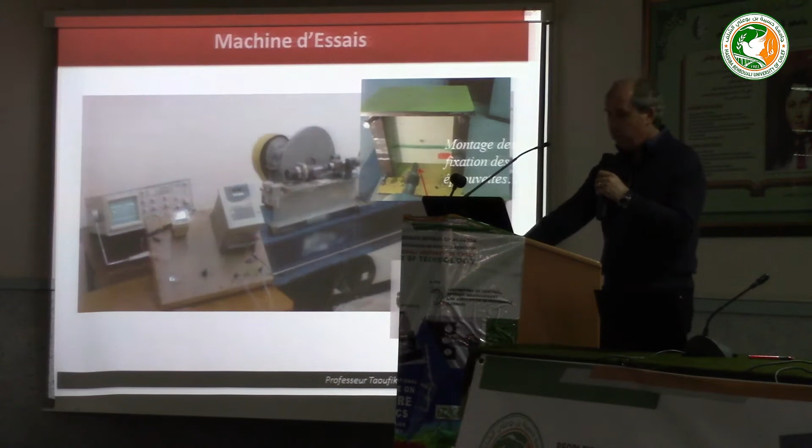Donc après, on fait des essais derrière, post-impact, par exemple. Là, c'est les essais de compression. On fabrique tous nos montages d'essais. On n'achète jamais les montages d'essais.

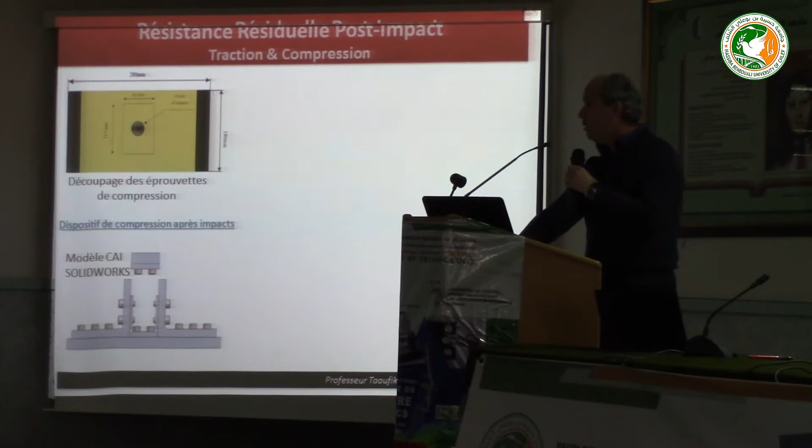On les fabrique, on les conçoit chez nous. Ça, c'est un montage pour faire de la compression. Donc ça c'est la plaque initiale, on coupe autour de l'impact une petite plaque, c'est celle-ci. Après on fait des essais de compression pour quantifier la rigidité et la résistance résiduelle de cette plaque impactée.

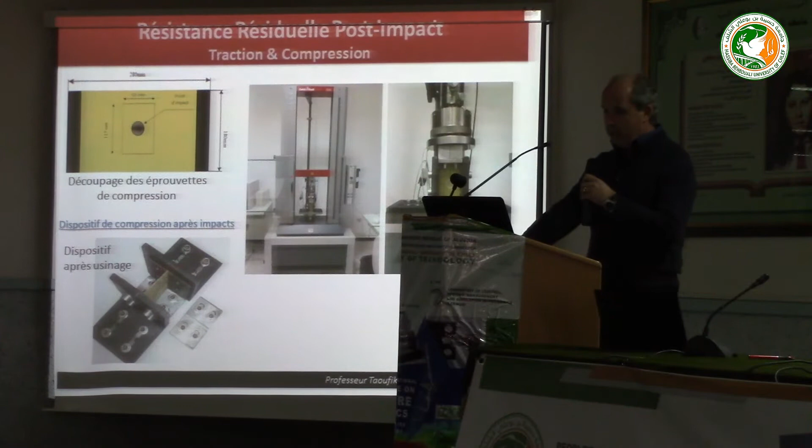Nécessaires au soudage. Je vais essayer de vous montrer la vidéo.

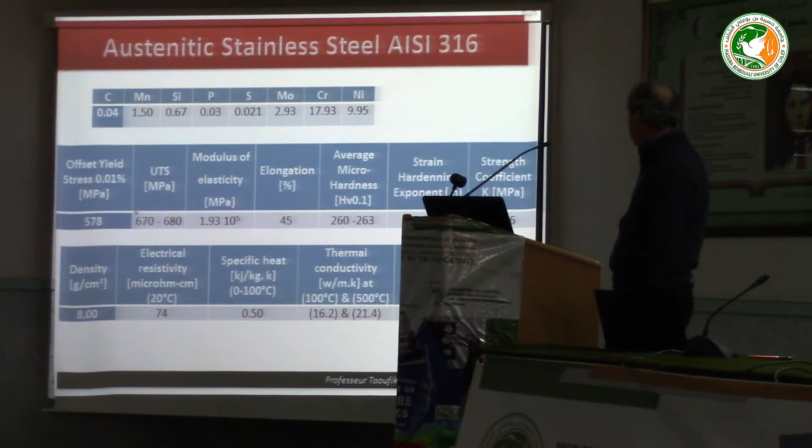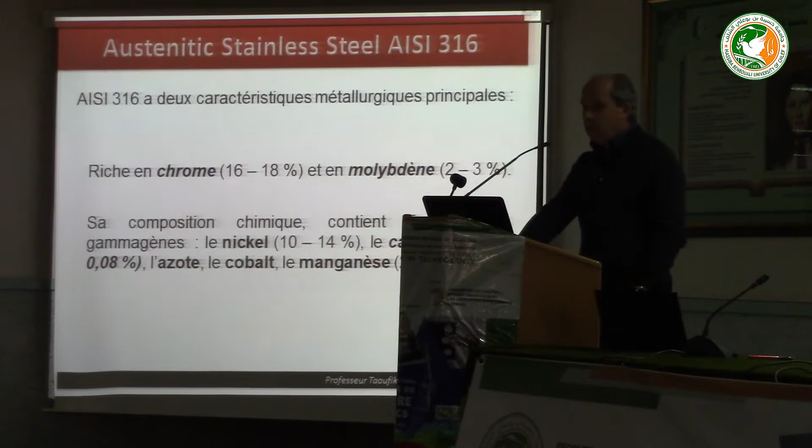Juste quelques mots sur cette nuance, c'est-à-dire les aciers austénitiques. Donc, par exemple, le 316, sa caractéristique métallurgique principale, il est riche en chrome et en molybdène. Sa composition chimique contient 5 éléments gamma-gènes.

Donc c'est un matériau très délicat. À l'élaboration, il faut faire très attention parce que ces éléments-là peuvent élargir le domaine ferritique, par exemple. Ces éléments-là peuvent aussi élargir le domaine austénitique.

Et en élaboration et en service, on peut avoir des surprises. Par exemple, la présence de la ferrite résiduelle ou la transformation en martensite par refroidissement ou par déformation peuvent beaucoup influencer l'austénite. La ferrite, on en a déjà parlé hier de ce problème-là, pourrait apparaître sous forme de bandes parallèles à la direction du laminage.

Voilà, c'est les bandes de ferrite. Donc malgré que ça peut être un avantage, ça peut aussi être un inconvénient. Par exemple, pour la soudabilité, c'est un avantage. Par contre, pour la durée de vie, c'est un inconvénient. Donc ces bandes de ferrite altèrent fortement la durée de vie du matériau.

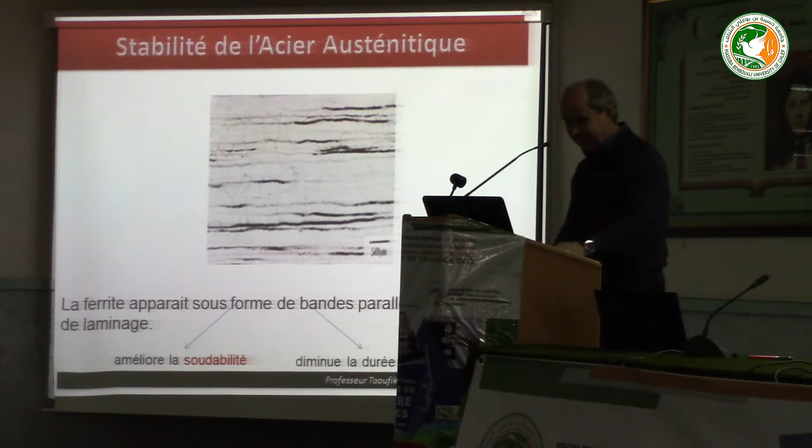Donc quand on démarre la rotation d'une partie, par exemple celle-ci, elle est fixe, elle pousse. Donc on est à la température de la chambre, 23-24 degrés. Et donc après, on a l'élévation de la température jusqu'à la température maximale.

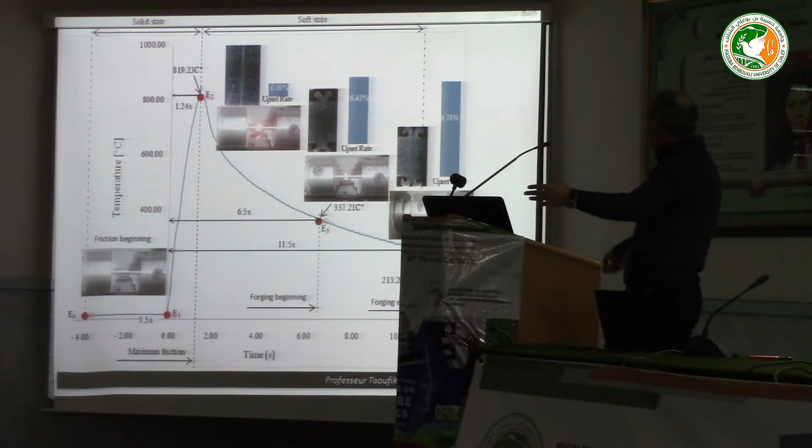Donc quand vous êtes en train de souder, en dessous de ce sommet-là, vous voyez ce flux de chaleur. Donc entre ce point E2 et E3, c'est là où on aura la diffusion de la température, donc vous aurez le grossissement du grain. Entre le point E1 et E2, vous avez un affinement du grain.

Donc, et quand on arrive ici, on arrête, on stoppe. Il n'y aura plus de rotation. On va injecter une autre valeur de pression, qu'on appelle la pression de forgeage, sur un temps donné, pour faire évacuer la matière pâteuse vers l'extérieur et former définitivement le bourrelet.

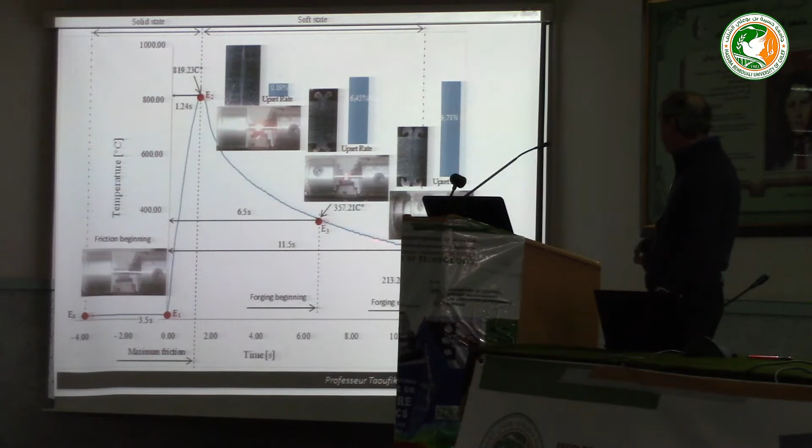On comprend bien que le bourrelet commence à se former entre le point E2 et E3, et sa forme finale, elle le prend entre E3 et E4. Donc si je regarde ce qui se passe ici, voici l'aspect physique du cordon de soudure.

Si je regarde maintenant la microstructure, la microdureté, c'est celle-ci. Ce que vous voyez ici, la ligne, c'est la moyenne de la microdureté du métal de base. On comprend bien que la microdureté a augmenté, donc on a un affinement du grain et une augmentation des propriétés mécaniques du matériau.

Si on arrive maintenant à la fin de la phase de friction, avant de commencer le forgeage, voici, on voit bien qu'on a commencé à former le bourrelet. Et à ce niveau-là, si je regarde la micro-dureté, c'est la courbe rouge, on voit bien qu'il y avait un grossissement de grain et la micro-dureté a fortement chuté.

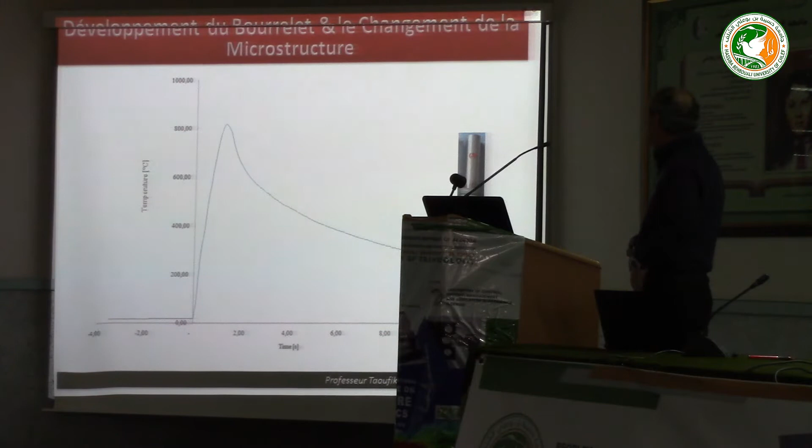Et si je continue maintenant, si j'arrive jusqu'à la fin du forgeage, c'est-à-dire à la fin de l'opération de soudage, le bourrelet, sa forme augmente, c'est-à-dire la consommation de la matière augmente. Et si je regarde ce qui s'est passé au niveau de la microstructure, je constate que la partie rouge, qui représente la deuxième microstructure, a augmenté.

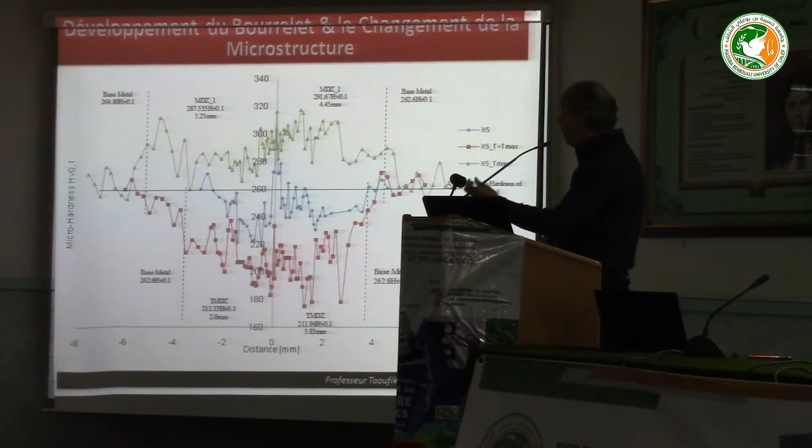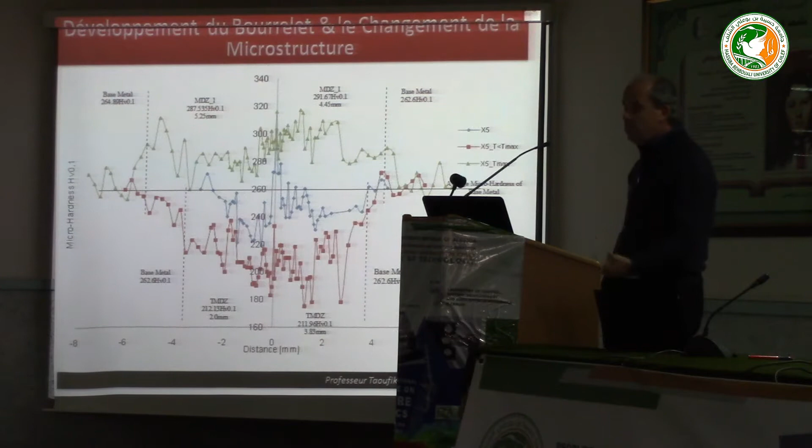Et le phénomène qui se passe ici, c'est cette formation de ce qu'on appelle le cœur dur. C'est-à-dire, là, on est en présence d'un petit noyau qui a des propriétés fortement hautes et des grains fins, mais en dehors de cette partie-là, on a pratiquement un joint soudé qui a les propriétés de la matière de base, ou proche de la matière de base.

Ça, c'est la comparaison entre deux conditions de soudage. Souvenez-vous, dans le tableau, on a montré X2, X4, X5. X5, la température max, c'est de l'ordre de 819 degrés, et X4 est de l'ordre de 870 degrés. Donc, plus la température max augmente, plus la largeur du cœur augmente, et le pic est élevé.

Donc, la question, ou le problème qui se posait à nous, quand on était en présence de ce phénomène: comment je peux supprimer ou diminuer l'effet de ce cœur? Parce qu'ici, vous avez une microstructure qui est différente à celle-ci.

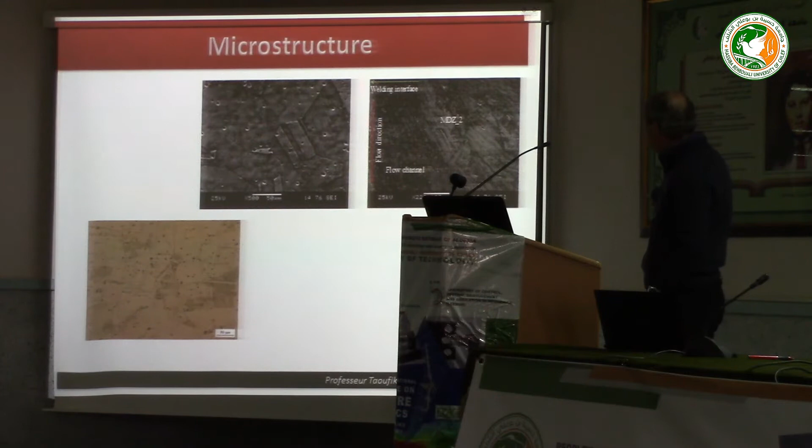Et là, c'est le canal avec lequel, ou à partir duquel, on a l'évacuation de la matière quand on soude, quand on ramène la matière à l'état pâteux et on déclenche la pression de friction et de forgeage.

Donc en réalité, on a fait une batterie de vérifications, par exemple de l'EDX ici, pour vérifier si les éléments alliés principaux de la matière ont bougé ou pas. Là, on constate qu'on a une très bonne répartition, comme celle de la matière de base.

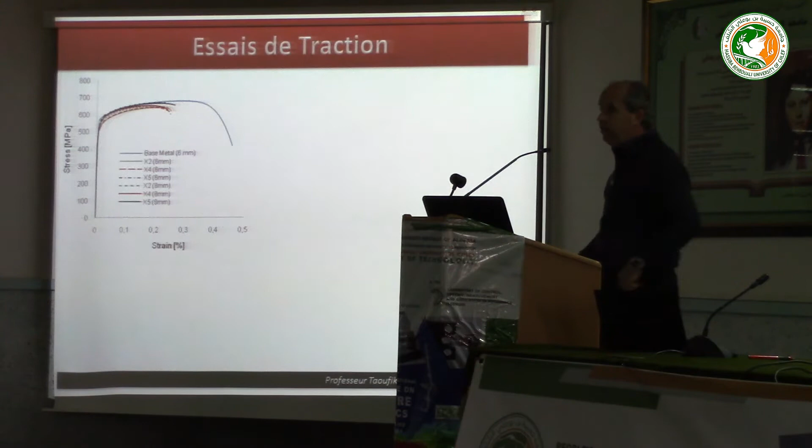On peut faire des essais de traction. Là, qu'est-ce qu'on constate? On constate que quand on soude, on n'altère pas réellement les propriétés mécaniques comme la limite élastique et la limite à la rupture, mais on diminue fortement la ductilité. Et ça, c'est dû à ce fameux cœur qu'on fait naître au niveau de l'interface du joint soudé.

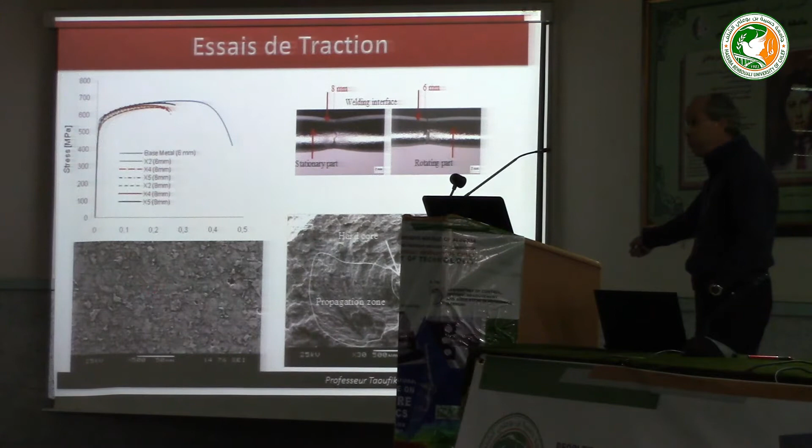Voilà, je vais terminer. Donc, on a repris les travaux, mais je ne vais pas vous dire comment; là, on constate sur ce rang qu'on n'a pas de cœur, on n'a plus de cœur. Donc, la soudure a pratiquement les mêmes propriétés que le matériau de base. Je vous remercie.

The hard facing technology used for this paper is also known as plasma welding. Plasma represents an electrically conductive, dissociated, and highly ionized gas which is created inside a device called a plasmatron and serves the purpose of an electric arc.

The plasmatron receives its power from direct current and consists of an electrode which acts as a cathode, then a copper nozzle, and the workpiece, which acts as the anode, with an isolator between them. The power that is supplied at plasma welding, the copper nozzle narrows the...

The advantage of plasma welding over some more conventional procedures such as tungsten inert gas welding is that it achieves higher temperature with better temperature distribution, although at the moment I cannot remember how exactly.

Now, an important aspect for plasma welding is the gas that is used. When choosing the gas or a mixture of gases, one should have in mind the atomic and specific masses, as well as the thermal conductivity coefficient, which is of great importance when selecting the plasma gas. Also, it is preferred for these gases to have lower values of ionization energy.

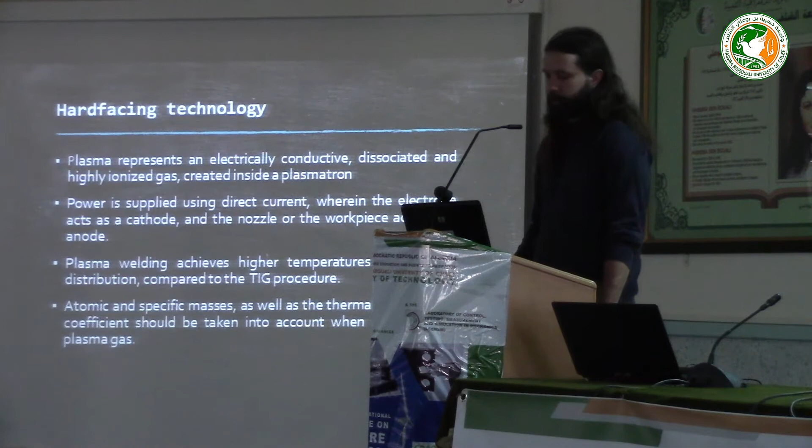Normally, pure argon is used for plasma gases with a very high argon content, because it has many advantages. It is inert, so it doesn't react with other materials, it doesn't cause metallurgical problems, it has low ionization energy, and of course it is cheap.

Applying of a protective layer to the tooth by plasma, in this case, was performed using eutectic Castolin equipment, and pure argon was used as the shielding gas, whereas the plasma gas consisted of a mixture of argon and hydrogen.

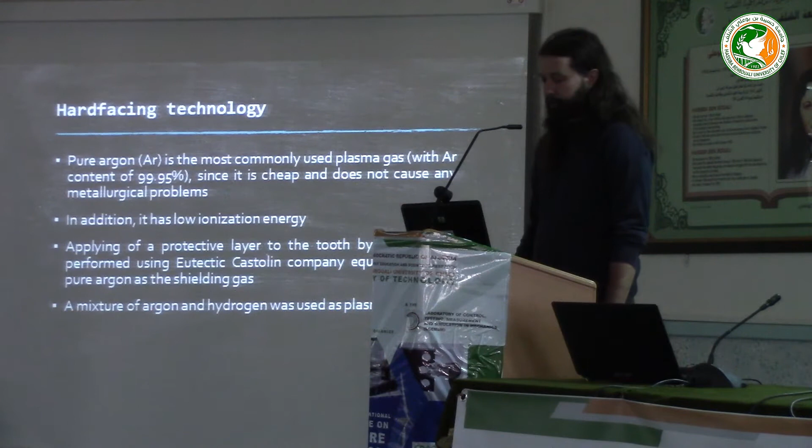As I have mentioned, the goal was to create a welded layer with a thickness of 6 millimeters on the tooth in order to increase its wear resistance. Once the hard-facing process was complete, the macrostructural and microstructural analysis of the welded layer zones were performed. This was achieved by cutting the tooth model in half, but that will be explained a bit later.

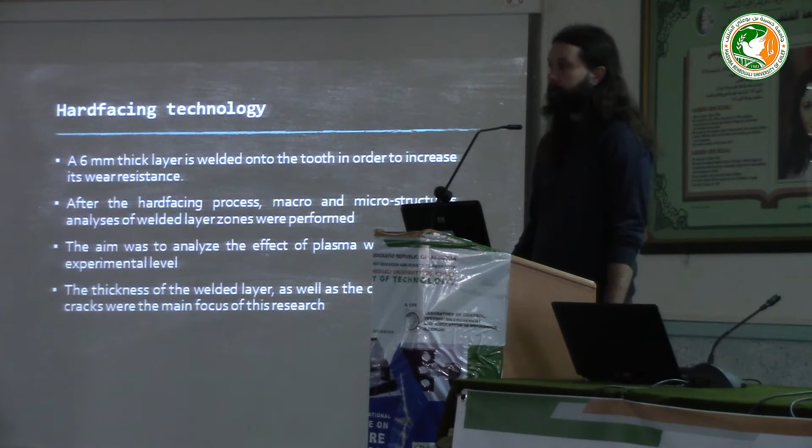The idea was to analyze the effect of plasma welding on an experimental level to see where the cracks are initiated and how they are distributed. So the most important aspects researched here were the thickness of the welded layer and the distribution of the cracks, especially in the microstructure.

The parent material used for the tooth was 25 chromium molybdenum 4 QT steel, according to DIN standard. The QT designation stands for the fact that it was delivered in a quenched and tempered state. It is a low-alloyed, heat-treatable steel with good weldability, and its tensile strength typically ranges between 700 and 950 megapascals.

Such materials are usually used in automotive and aircraft industry for components which require high toughness, such as axles, axle journals, turbine parts, rotors, etc. This steel typically has a hardness of around 20 HRC, which, as you can notice, is significantly lower than the hardness of the welded material.

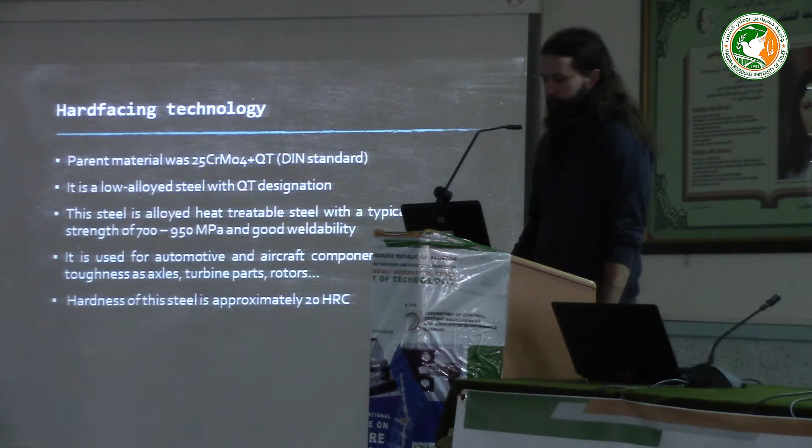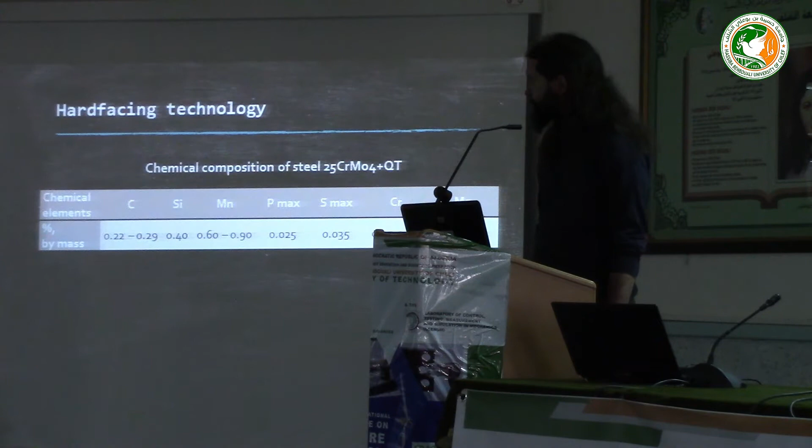Here you can see the chemical composition of the parent material with the content of carbon, silicon, manganese, phosphorus, sulfur, chromium, and molybdenum.

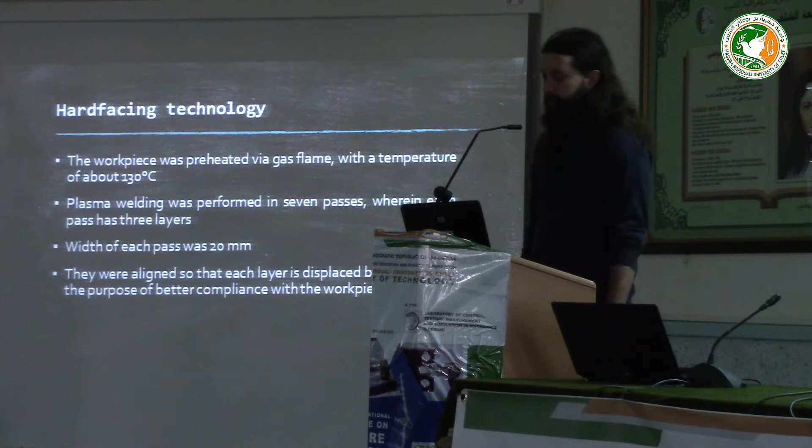As mentioned previously, in certain cases there is a need for preheating before the hard-facing process can begin. Such was our case, and the workpiece was preheated using gas flame, with a preheating temperature of around 130 degrees Celsius. The number of passes for the plasma welding was determined to be 7, and each pass...

contained 3 layers. The passes were 20 millimeters wide, and they were aligned in a way that each was displaced between 2 to 3 millimeters relative to the other one, so that they could better follow the contour of the marble milling tooth itself.

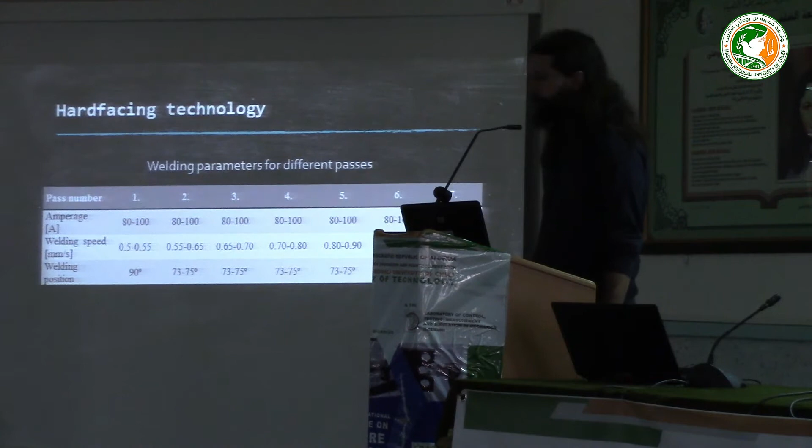Now here, you can see the welding parameters for each of the different passes. The amperage was the same throughout the hard-facing process, whereas the welding speed increased with each layer. It should also be mentioned that the first pass was at the bottom of the tooth, and the final 7th one was at its top. The angles, of course, were selected depending on the tooth geometry.

So here you can finally see what the tooth looked like before and after the plasma welding hard-facing was performed. On the left you have the state before, and on the right part you can see all of the 7 welded layers. Shown in the right picture is the welding plan for the welded layer and what it should have looked like.

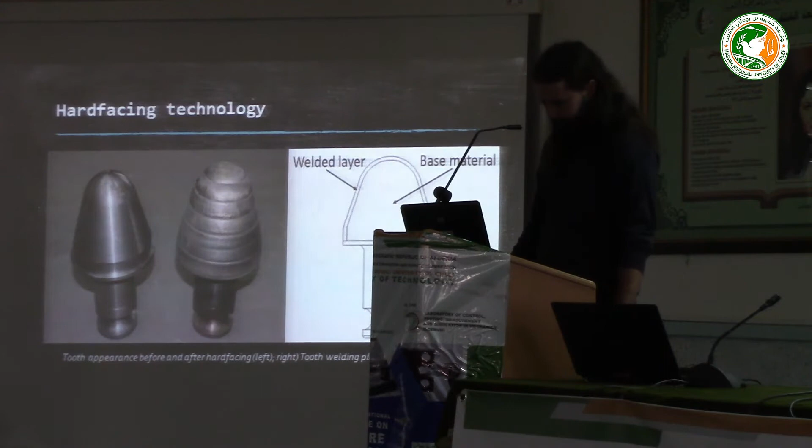Now, in order to determine the macro and micro structures of the surface or the welded layer, the tooth was cut longitudinally into two halves using a EDM machine. The rough measuring determined that the layer thickness ranged from 3 to 7 millimeters, 3.1 to 6.4 more accurately.

These sections were chosen based on the content of tungsten carbides, to see how their presence would affect the amount and distribution of cracks.

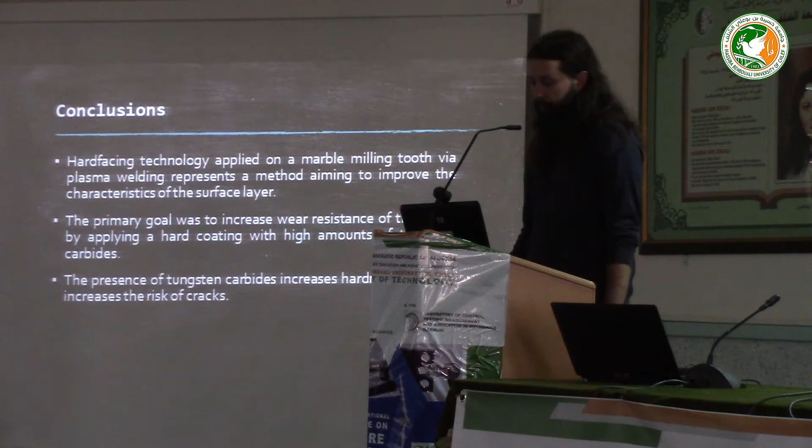This is the result of temperature differences that occur during the hard-facing process, because the materials melt and then, due to rapid cooling, they contract quickly, which results in considerable strain levels, which in turn cause cracks to appear.

The microstructural analysis of the sections determined, as I mentioned, that the cracks propagated mostly through tungsten carbides, which explains why there are significantly more cracks in the areas with higher tungsten carbide concentration, but did not, once again, propagate through the parent material.

However, as we have seen, these cracks can also further propagate, which can lead to significant wear due to fragmentation and the further degradation of the parent material.

As I mentioned, the strain level and the amount of cracks can be reduced by applying the buffer or intermediate layer, which serves as an elastic connection between the hard welded layer and the soft parent material, because we have seen that there is a significant difference between the hardness of these two materials. This layer's main role is to prevent crack propagation into the parent material.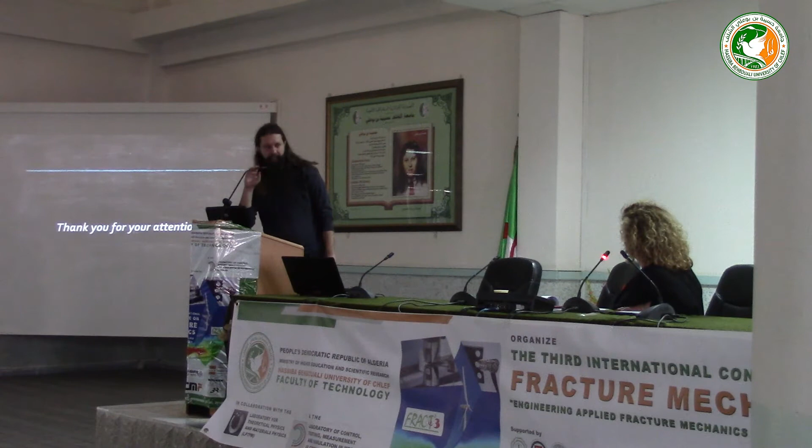We just mentioned that as one of the ideas, but we didn't go into too much detail. It's not what we have done here. This is just a proposition of how to increase the plasticity.

And what about the shielding gas? I didn't catch what shielding gas did you use here. Pure argon. And during the plasma welding, was it a mixture? The plasma gas is a mixture of argon and hydrogen, and the shielding gas is pure argon.

And who did the technology? The welding technology was performed by our students. I worked with that guy, and he did this welding, this hard-facing welding, for the purpose of his masterwork.

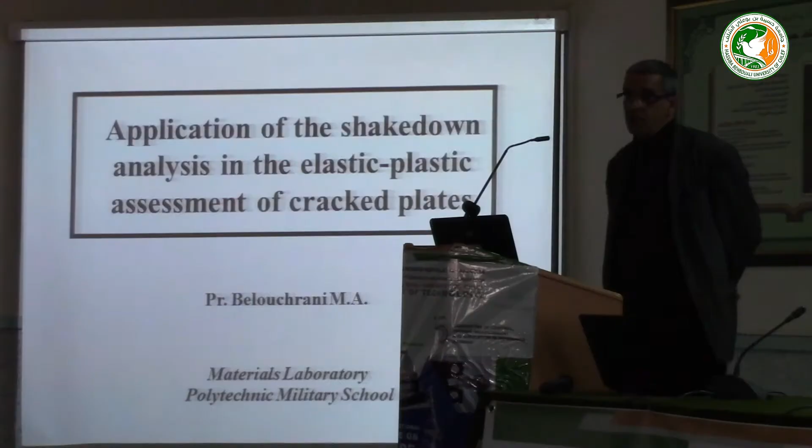We know that many structures used in industry, such as aeronautic, automobile, and maritime, are plates assembled with welds or screws. For the design of this plate, we may generally call on the classical concept of limit analysis or incremental method.

But this method or these techniques present a disadvantage in that there is necessity to know the exact loading history. For this, we may call on the shakedown analysis, which found its application privileged because it does not need the loading history.

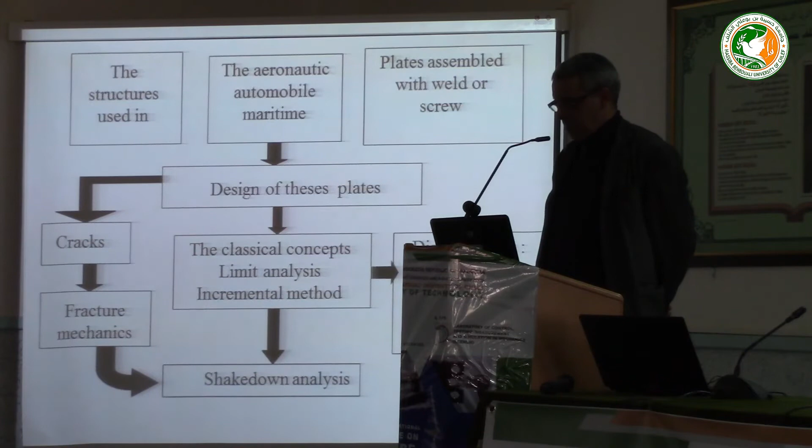In presence of cracks, where generally we use the concept of fracture mechanics, a few years ago we made an extension of the shakedown theorem to cracked bodies.

To formulate this theorem, let's consider a cracked elastic-plastic body with the boundary condition and the loading. We assume that the solution of the reference problem is given. The reference problem differs from the original problem only by the fact that it reacts purely elastically, with the same boundary condition and the same loading.

The theorem's statement is: we have a self-equilibrating stress field rho, which is time independent and self-equilibrating. The addition of this residual stress to the solution of the reference problem means we have no plastic flow.

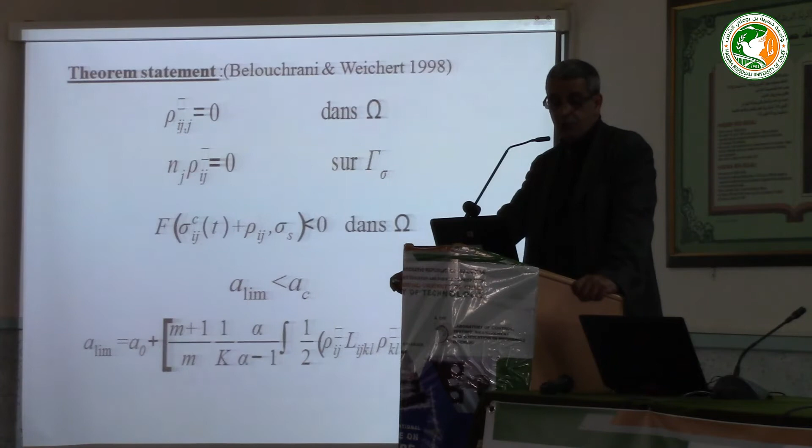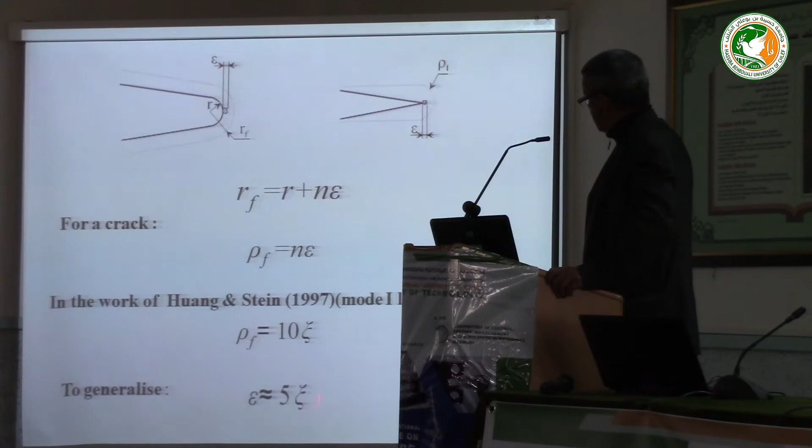So the problem to determine the safe shakedown factor, we consider an elastic plastic cracked plate subjected to a variable loading, P, which can vary arbitrarily in time between prescribed limits Pmin and Pmax. We research alpha, the load factor, the max of the load factor, where this condition are verified.

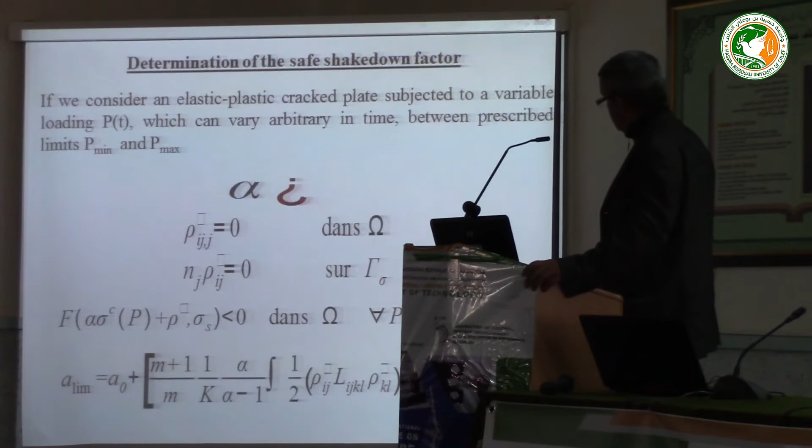So to summarize the problem, we have finite element coupled with mathematical programming to maximize the factor alpha under the condition of no plastic flow and no brittle fracture. So we use for the optimization problem the augmented Lagrangian, and we need the elastic solution of the comparison problem and the construction of the residual stress field. For this case, we use finite element method experiment in force, not in displacement.

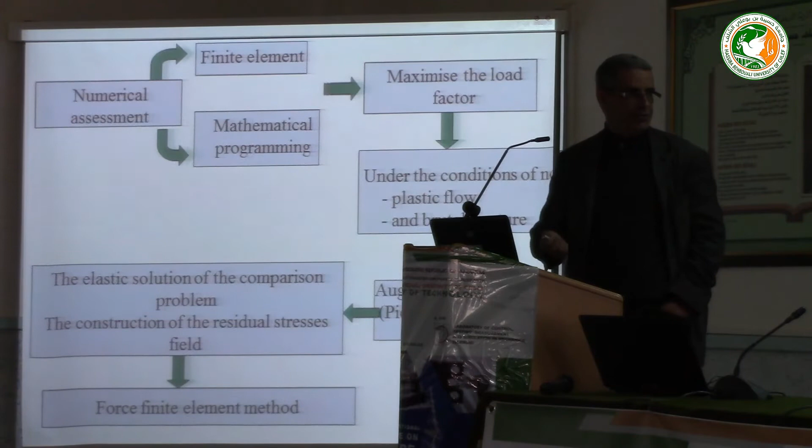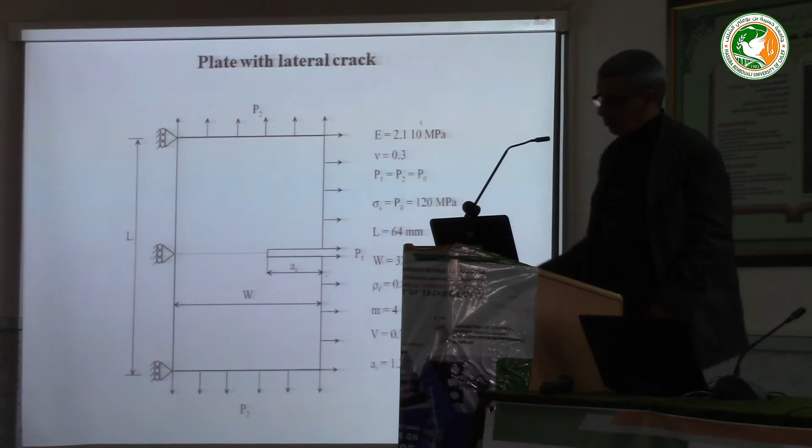We take P0, the load equal to the yield stress. For the symmetric reasons, we have considered only the superior half of the plate, and we show here the adopted mesh and the boundary condition.

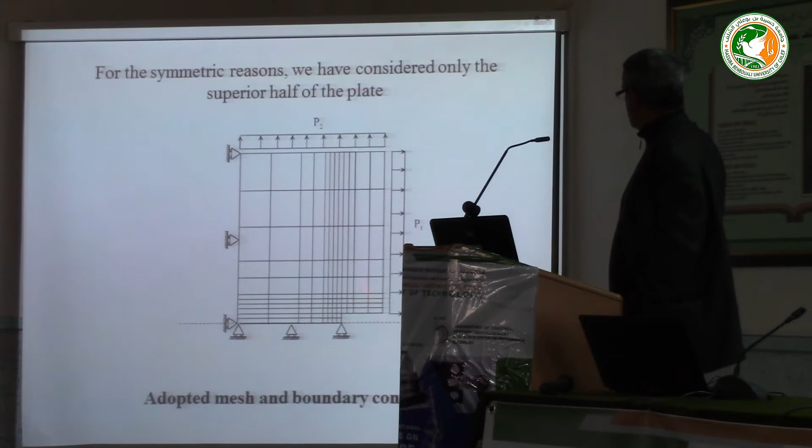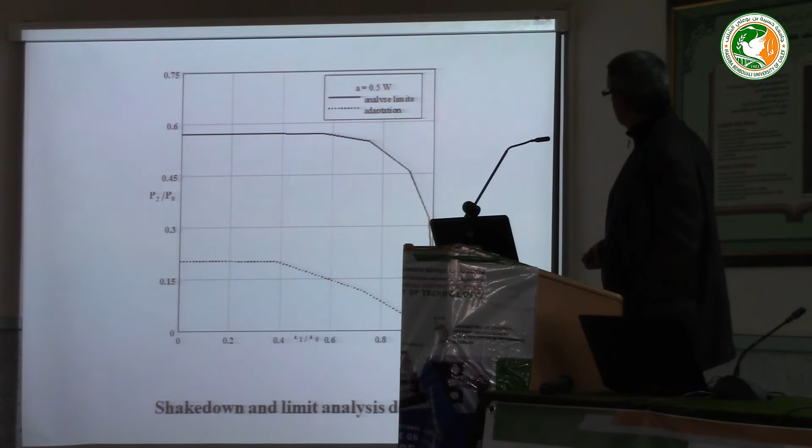Here is a comparison with the assessment for the limit analysis and the shakedown analysis for a crack length equal to half of the width of the plate. Here we have comparisons between shakedown, the limit analysis calculated with our program, and the analytic solution.

Here we show the variation of this loading factor with the ratio between crack length and the width of the plate.

We have calculated a stress intensity factor corresponding to the shakedown state. So we use this expression with shakedown factor, the load, and the root of pi a, to have the stress intensity factor, which will be compared to the fatigue threshold.

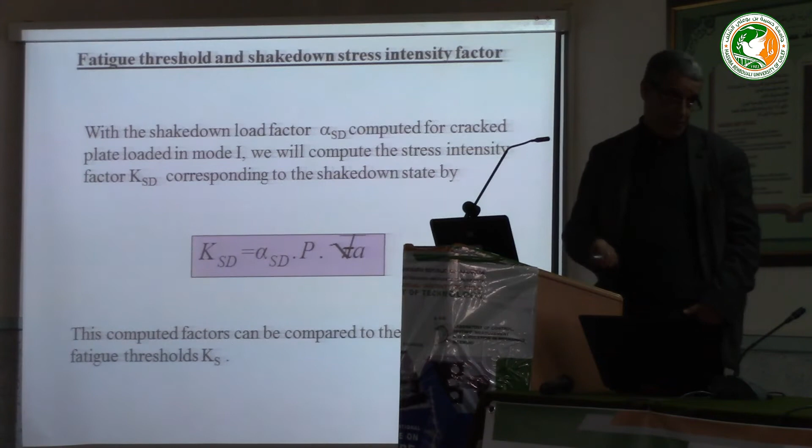Here we show that this factor, KSD, does not vary with the crack length. So we can assume that it can describe a parameter of the material.

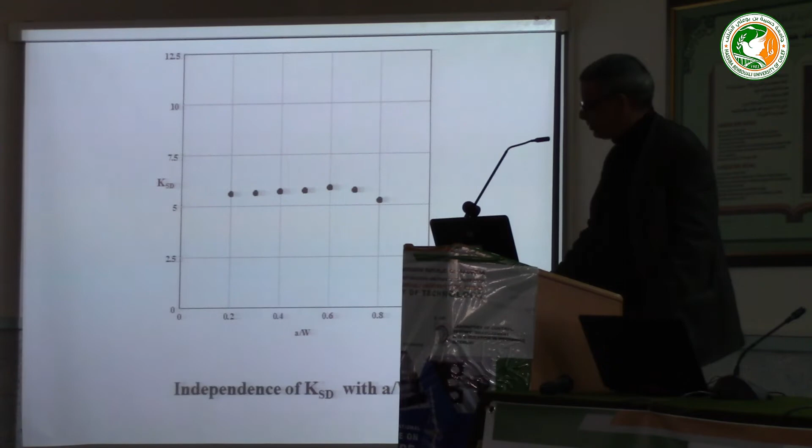Knowing that the relation between the fatigue threshold with the grain size is given by certain authors in the literature, we have this expression that this factor varies linearly with the root of the grain size.

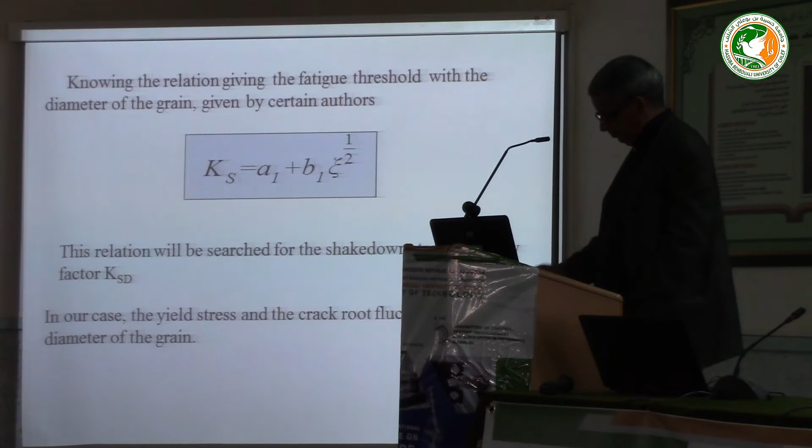So this relation will be searched for the shakedown stress intensity factor capacity. In our case, the yield stress and the crack root fluctuate with the diameter of the grain. So we plot the evolution of this ratio.

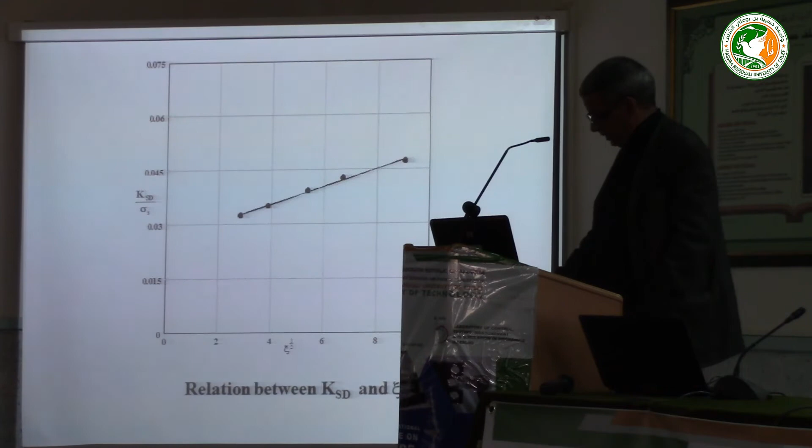So we have KSD on the plastic flow limit. According to the root of the grain size, we remark that we have linear variation. So we have this expression.

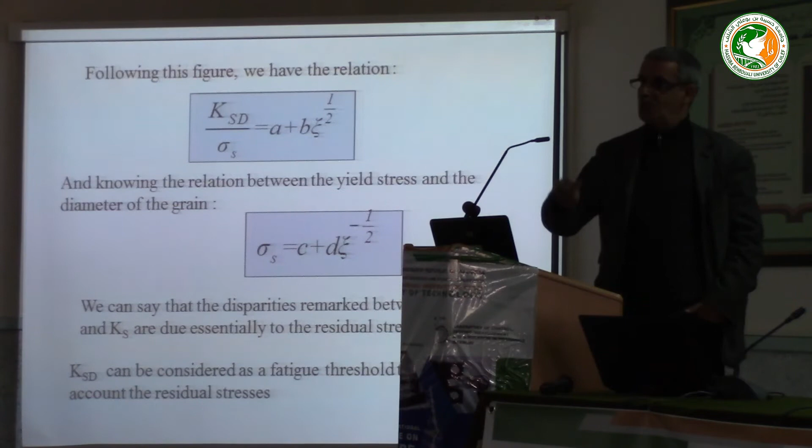Knowing for the material which verifies the relation, when the yield stress varies inversely proportional to the root of the grain size, we can say that the disparities remarked between the KSD and the KS fatigue ratio are

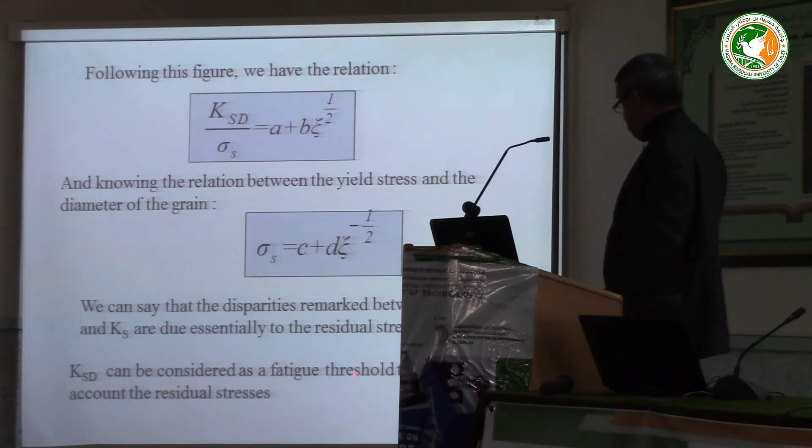due essentially to the residual stress, because in our work we take into account the residual stress. And KSD can be considered as the fatigue threshold, taking into account the residual stress.

In conclusion, in this work, a new method to predict the ruin of inelastic cracked structures is proposed. This method presents the following advantage: the use is simple. We make only elastic assessment, where the loading is variable between two limits.

It can handle nonlinear behavior because we consider elastic computation only on the reference problems, and this permits to determine the fatigue threshold.

I have a second work in review where I calculate for different modes of loading, a comparison with the value of fatigue threshold for different materials, and we found good results. I finish, thank you for your attention. Thank you.

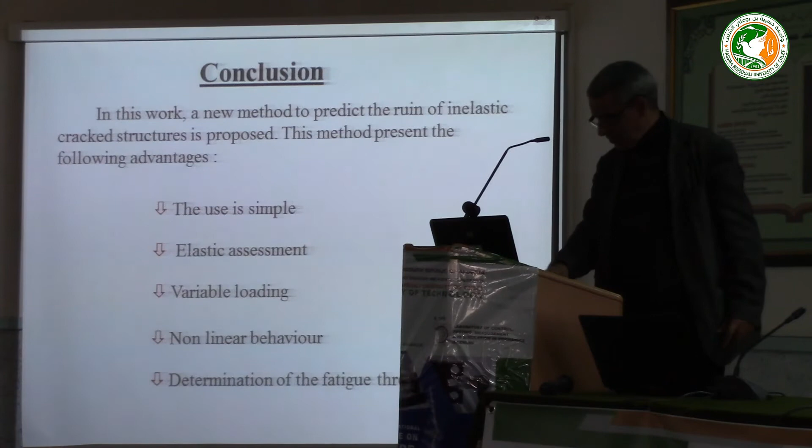I understood everything that Professor Belushani told me, but I don't know if you have some questions. It's a good result. We have some results for different materials and research. All the materials were metallic materials.

Theoretical investigation shows that for the model there is a problem with micro level and macro level, because there are two parameters: the micro yield stress and macro, the local stress and macro.

This fatigue threshold has two variations. At the start, there is the plastic flow which evolves over time, and the propagation of the grain. Later, it's the disposition of the grain structure. So here we have two evolutions at the same time.

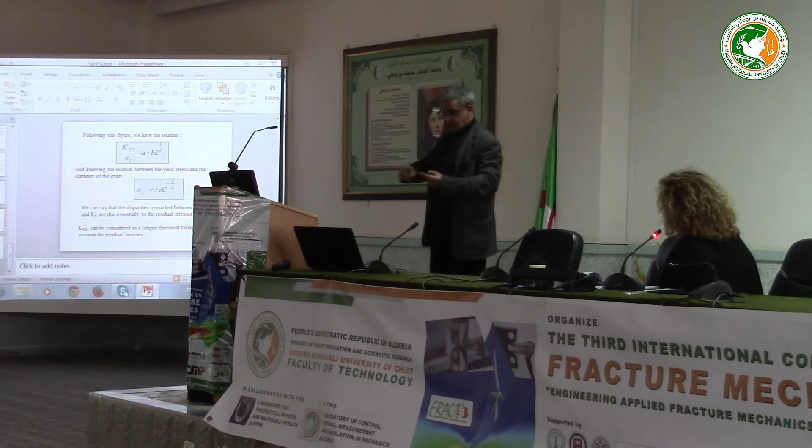We can have a term which is inversely proportional and a term proportional to the energy - two evolutions. One term depends on plastic flow, and the other on the situation of the grain. We are working on this: the size of the grain, and the disposition of the grain.

Okay, so the microstructure. Thank you very much once again.

So first of all, what we shall see in this research presented in this paper, as the title says, is the influence of exploitation conditions and welding technique on initiation of crack and its growth, as well as a solution for their avoidance.

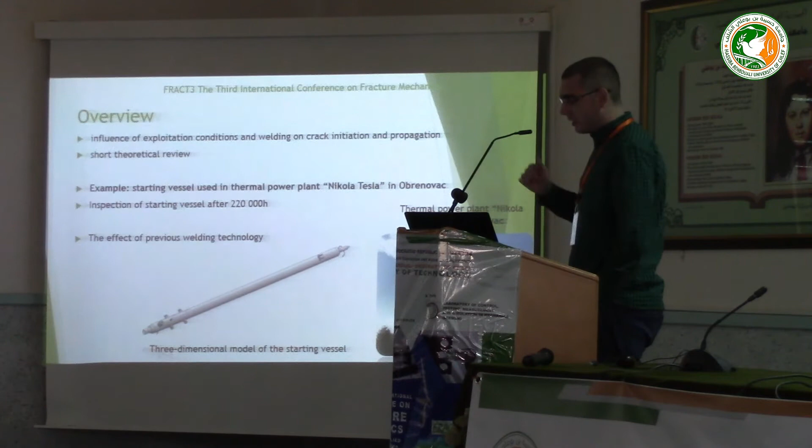You will see one example: a starting vessel used in a thermal power plant in Obrenovac. We performed inspection on this vessel that was in service after 220,000 working hours. Our team also analyzed the effect that could have influence on crack initiation, including the effect of previous welding technology used for connecting branches with the base of the starting vessel, as one of the possibilities for crack causing.

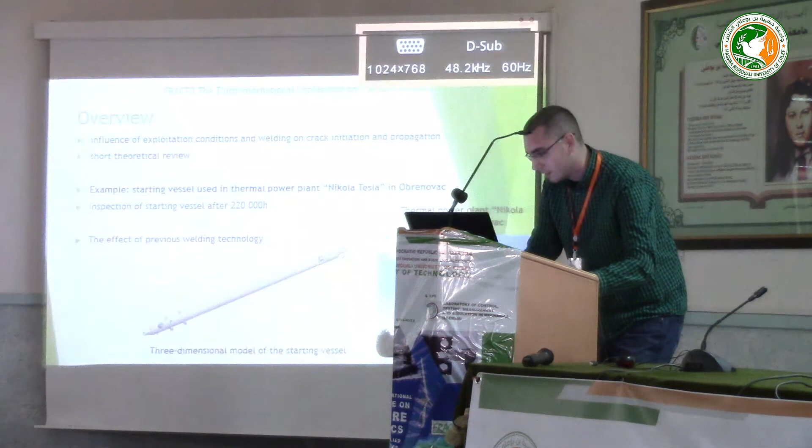Okay, let's start with a short introduction. Welding is the most commonly applied technique in manufacturing, used for manufacturing of processing equipment, pressure vessels, pipelines, but it's also used for repairing. This paper is very interesting because this is a case from industry - something that really happened at our thermal power plant. Mr. Branislav will present the problem because he is an engineer.

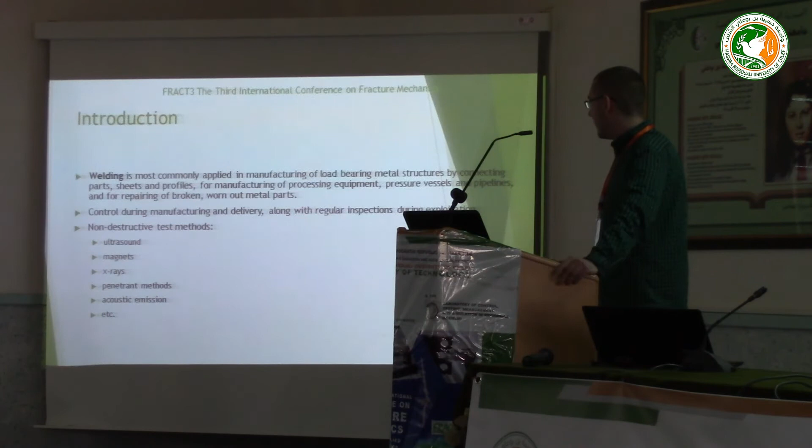During welding, we must use inspection before, during, and after delivery, and we must follow regular inspections during exploitation - it's very necessary. For this purpose, engineers use techniques such as ultrasound, magnetic technique, X-rays, penetrant method, acoustic emission, etc.

Now, as you may know, failure of pressure vessels represents a significant practical problem even nowadays, with all this equipment and new scientific software. But with adequate control and inspection, we can discover the crack, and with that prevent further crack growth, which could lead to the final failure of a machine part and cause death. That is the one thing that we must consider.

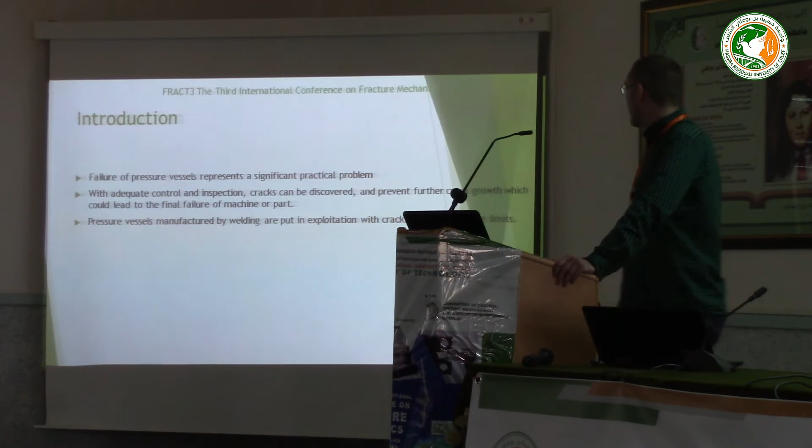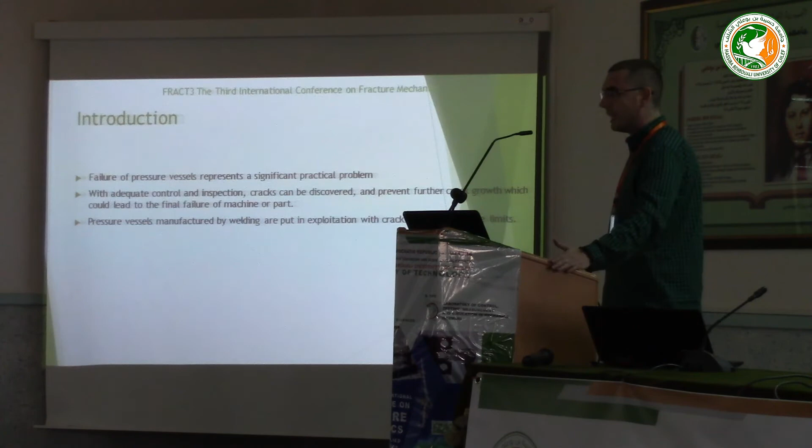Pressure vessels are manufactured by welding, and in service you can find cracks located in pressure vessels while they are in service. Okay, with all this inspection, correct cracks within acceptable limits are put back in service.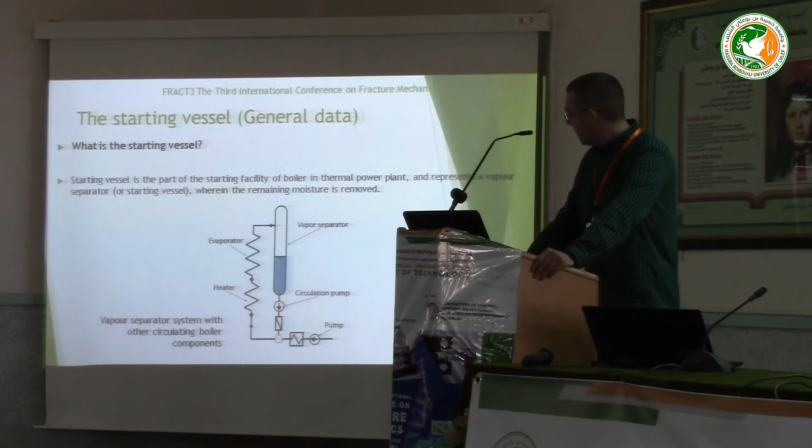This starting vessel is made of steel WB36. The first marking on the screen is in accordance with the German DIN standard, and the other is in accordance with the American standard.

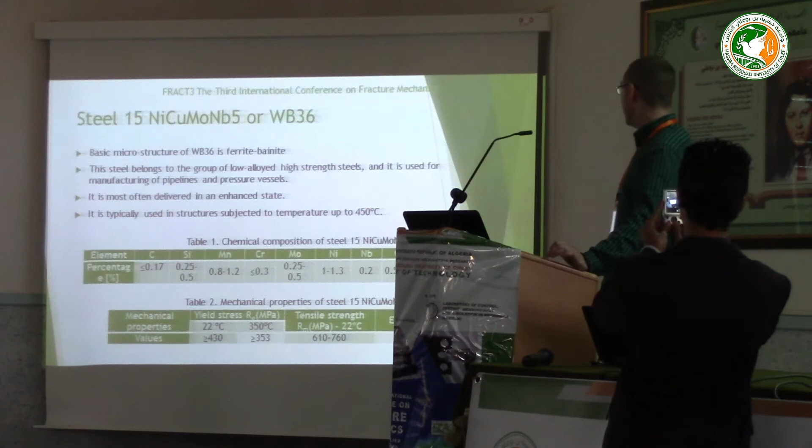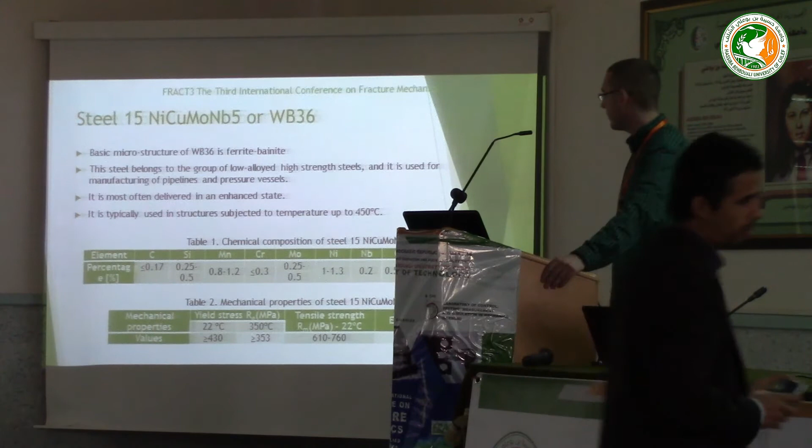The basic microstructure of this steel is ferrite-bainite. This steel belongs to the group of low alloy, high strength steels, and its main usage is for manufacturing pipelines and pressure vessels. It is most often delivered in an enhanced state, which results in a fine-grained microstructure. The main alloying elements of this steel are copper and niobium, and these elements define its characteristics.

On the slide, you can see the chemical composition of this steel and its mechanical properties.

The starting vessel was manufactured by connecting branches using a welding method. Branches were welded to the base of the starting vessel. The external diameter and outer diameter of the connecting branch, with their values, you can see on the slide.

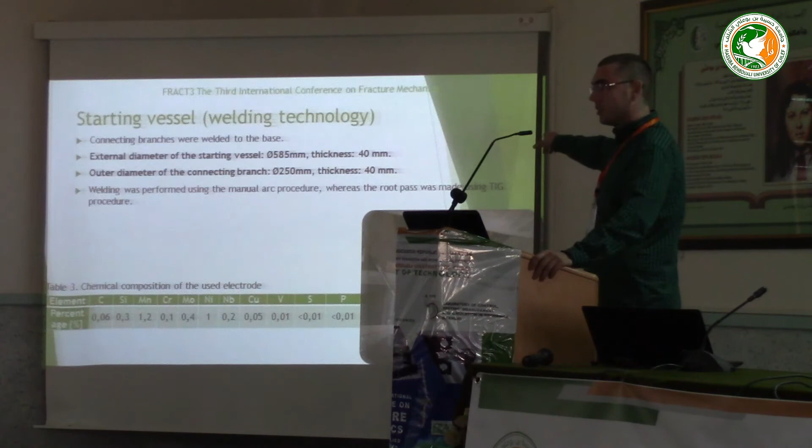This starting vessel was manufactured 25 years ago, so the welding technology and welding procedure were performed 25 years ago. Welding was performed using the manual arc welding procedure, and the root pass was made using the TIG procedure with a tungsten electrode. The chemical composition of the electrodes used, you can see on the slide.

Now let's see the working conditions that this starting vessel was subjected to. We monitored and collected data on the output of the starting vessel for 1,415 working hours, approximately 59 days. We can see the pressure and temperature values during this time, and you can see that the working conditions are below the design ones.

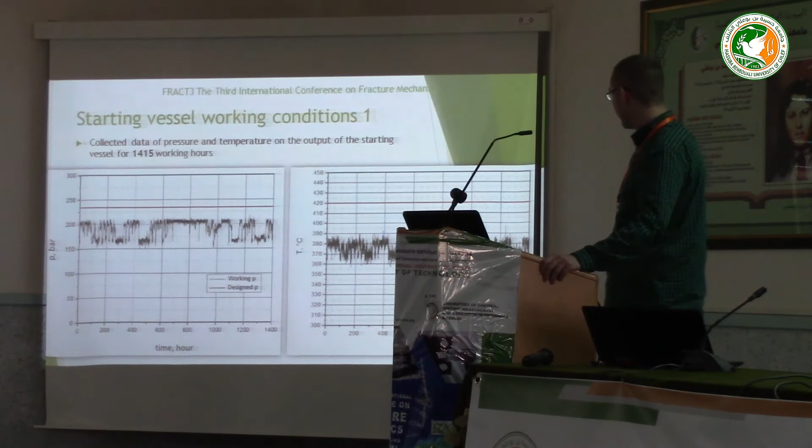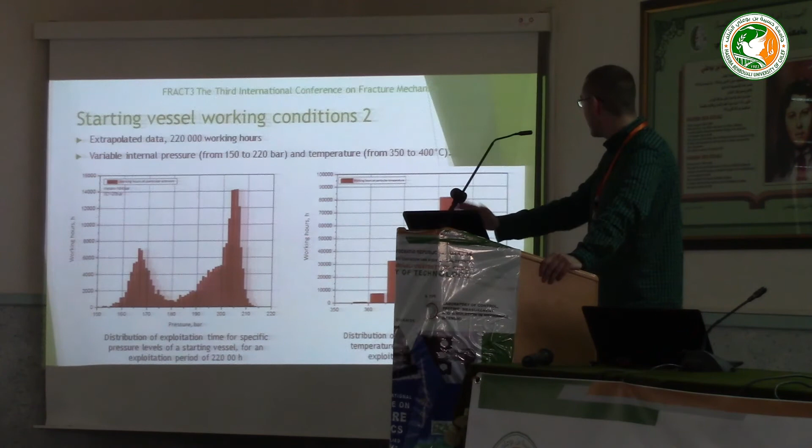We extrapolated this data and obtained values for 220,000 working hours. We didn't monitor the working conditions for 220,000 hours directly, we extrapolated this data. You can see the values of temperature and pressure during this period of exploitation. The internal pressure of the vessel was, most of the time, above 200 bars, and the temperatures were in the range between 350 and 400 degrees Celsius.

We examined the outer surface of the branches where the welding was done. We inspected all the welded joints on all five branches located in the starting vessel.

During examination, we discovered one crack. That crack was located on branch number 5. The crack depth in the fillet weld zone was 35 millimeters, and its length was 45 millimeters.

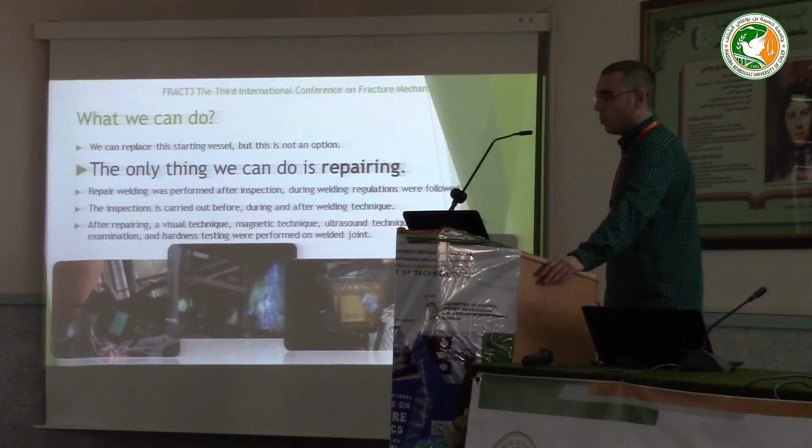Repair welding was performed after inspections, and during welding we followed all regulations, with inspections performed before, during, and after the welding procedure. After repairing, our team performed visual, magnetic, and ultrasound techniques of examination, microstructural examination, and hardness testing on this welded joint, and everything was fine.

So what can we conclude from this material? The main factors which affect vessel integrity include the choice of base material, the choice of additional material used for welding, the welding technology chosen, and the exploitation conditions. We have to consider all these things.

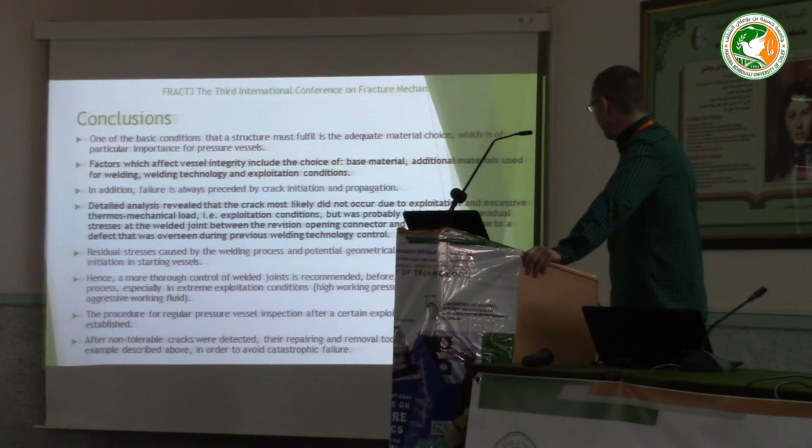Detailed analysis revealed that the crack most likely did not occur due to exploitation and thermomechanical load, but was probably initiated due to residual stresses at the welded joint between the revision opening, or it was overseen during the previous welding technology inspection 25 years ago. Hence, we recommend more inspection and stricter regulations, not like what we just saw.

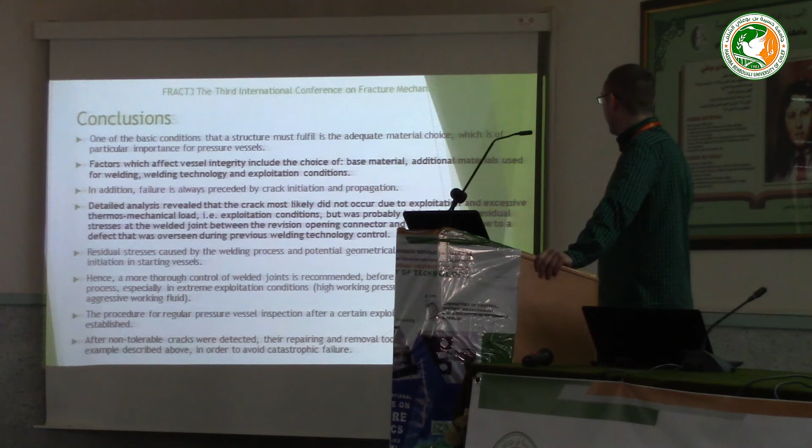This inspection was performed in 2014, and the next inspection was performed, I think, in October 2016—I'm not sure—and everything was fine. So with regular inspections, we can avoid a catastrophic failure. That would be all. Thank you for your attention.

Thank you very much, Branislav. In spite of several problems that you had...